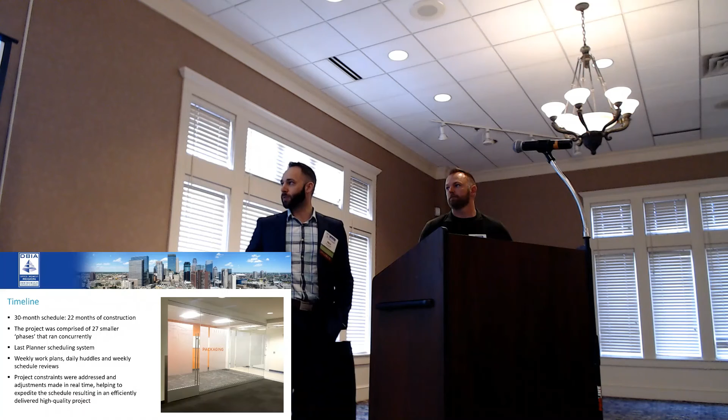As I alluded to, we've got a 30-month schedule up here, but it was probably more like 5 years trying to get to a design that would actually work and move the project forward. There were 6 to 8 months of actual formal design process, and then probably 4 or 5 different areas that were designed over the course of the project, which is one of the reasons I think design build was selected for the delivery method. It allowed design to run in parallel with the beginning of construction.

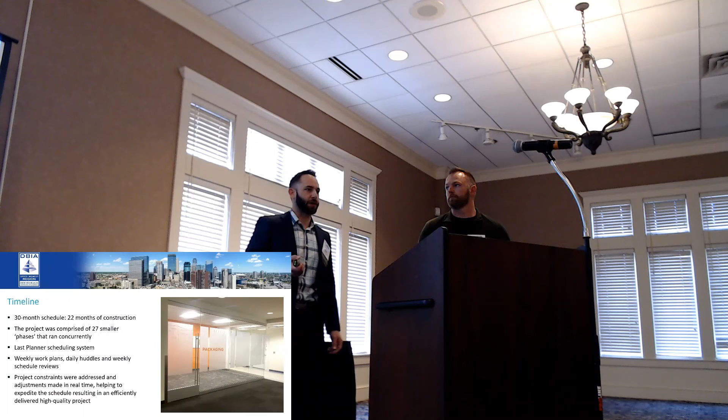Because of the way the project had to be built out, we built it out in 27 smaller phases over those 22 months. So I think we had, what, a dozen phases going at the most? 13 phases going at one time, and one phase was 4 floors of an entire wing.

So you can imagine that's a lot of different areas to be working in, especially in a running, occupied facility that produces food. So the whole time while we were doing this project, General Mills was still in business, making food for sale for the general public.

So they have the capability to do R&D, but if needed, as some of their product lines increase in sales, or marketing does a great job and they're selling more product, the facility is able to ramp up and help supplement production in some of their other manufacturing facilities.

So how did we do it? McGough pretty typically employs what we call the last planner scheduling system. The word collaboration, I suspect, is going to come up a lot in today's presentation. It's a collaborative approach, both between design, contractors and subcontractors, to align on the goals of the schedule, both from a macro level and a micro level—starting with the main project schedule and drilling all the way down to knowing what the work for the next day is going to be.

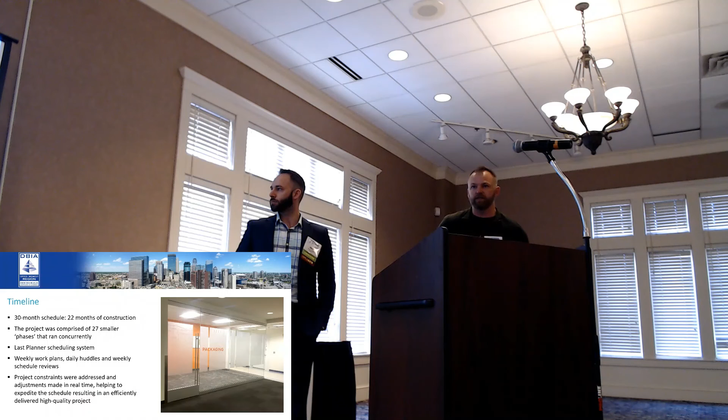I mean, that's where I'm sure most of you use the last planner system, but for us, just having weekly work plans to identify what areas we're working in an occupied facility is pretty standard these days, but it worked great there.

Team structure—we listed out several people here, but kind of the couple of takeaways: General Mills at one point documented, I think, 250 people of management level or above that were involved in the coordination of the project over the course of its duration.

Why design build? I already alluded to it a little bit. It allowed us, from the beginning, to run parallel with construction and design. General Mills is a fairly sophisticated client, and they ended up providing some of the initial groundwork for the design that Alliance then made happen, really, in effect.

The planning process was allowed to move forward on a lot of the more office remodel type stuff. A lot of the beginning of the project from a design perspective was focused on some of the more equipment-intense areas like pilot plants and labs and some of the more mechanical areas.

Mechanical and electrical trade partners were brought in early. We did have a little bit of a budget alignment issue out of the gate. We were able to reel it back in, get back to where we needed to for the client's needs, and move forward—able to complete the project on time and under budget. One of the things that actually helped facilitate the schedule was breaking this project down into so many individual phases. By executing on each of those individual phases, we effectively executed on the main project.

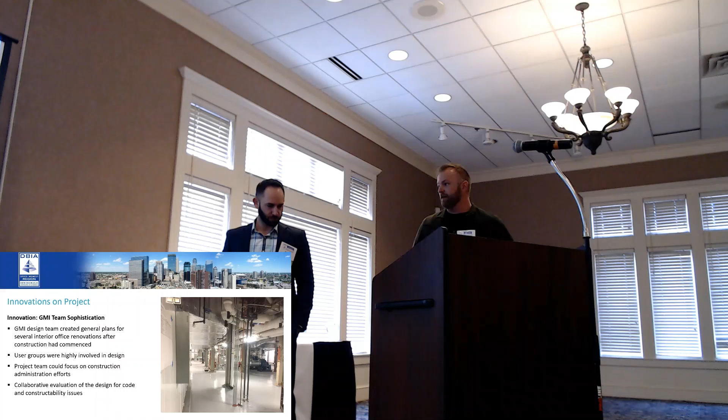I'd like to highlight this picture. At face value it's kind of a boring picture, but for me this is one area where we really excelled. We put in 7 brand new air handlers in the building, an existing building, and expanded a fan loft 16 by 100 feet on both sides to accommodate these new air handlers. If you can imagine flying air handlers over an existing building, the coordination, just moving people from below the flying area, was a nuts and bolts thing, but another difficult area where coordination was key.

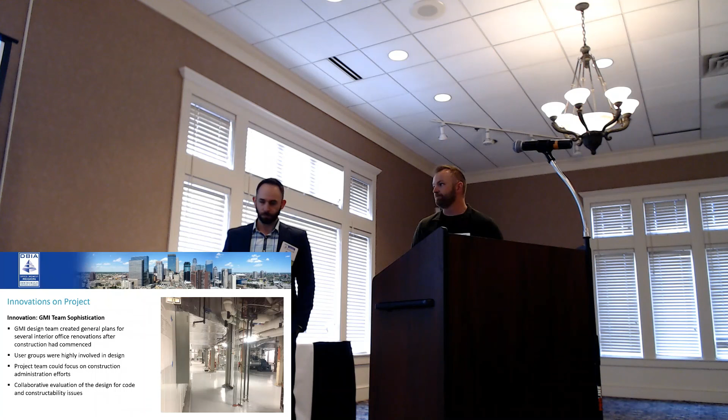The building was fully occupied and operational the entire time, including 16 or 17 product runs over the course of the project that all went off without a hitch. Again, having all those people in the coordination meetings, and the amount of meetings that precipitated from what needed to happen, was key, having the right people in those meetings.

Another challenge we faced was adding a couple of decks to an existing space to give them more floor space. In one of the wings, Wing 7, there were 3 floors in the space, and they wanted to add another floor to support conditioned storage boxes that were being brought in.

The existing footings of the structure would not support this added weight. So we were able to utilize the west side of the building, create an opening, and mind you, I wish we had a plan view just to show how deep into this facility we were, but we essentially cut and removed existing footings 16 feet below grade, excavated and poured new footings - one footing in particular was about 11 feet below grade, underground - and installed new structural steel, all without interrupting operations.

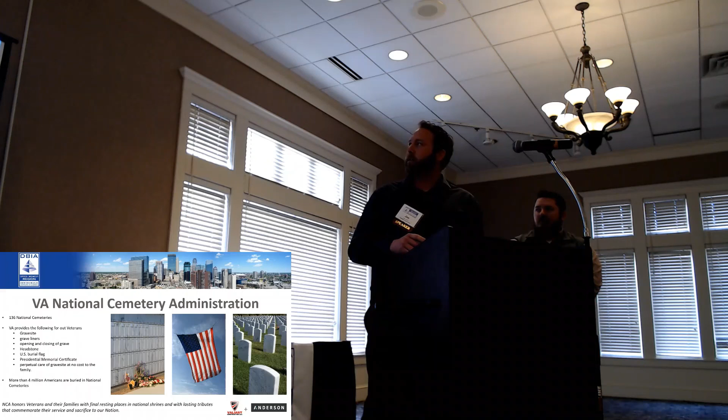So to sum it up, about 10 years ago the National Cemetery Administration faced congressional concerns in Washington: what are you doing for rural communities? You've got beautiful national cemeteries across the country, but they're all in metropolitan areas. Fort Snelling has full staff service, beautiful grounds, but what do you do for areas that don't have access, that are 300 miles away? They found that veterans living remotely weren't using these services or getting buried in a national cemetery.

So the Department of Veterans Affairs did an audit. They looked at all their national cemeteries and decided they needed to pick specific locations to implement a rural national cemetery. Fargo, North Dakota was one choice, and you might think Fargo's pretty big, how do you call that rural? Well, Fort Snelling is about 250 miles away, and the next cemetery in Bismarck is another 250 miles away, so this was a prime location for the rural initiative.

After the audit, they came up with a sketch plan and parameters for what a rural initiative national cemetery is: a condensed version of a national cemetery with all the same elements, except there's no staff working there. Everything is administered remotely—Fort Snelling National Cemetery administers this cemetery, meaning they hire out grave diggers to bury the casket and hire people to provide services like taps and the 21-gun salute.

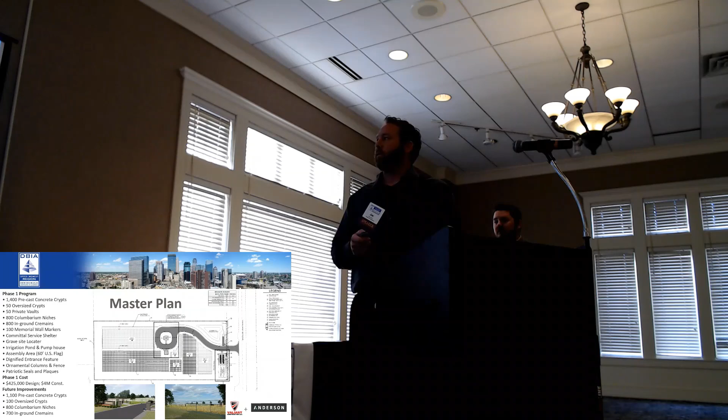I'll walk through some of the program elements and recap with photos later. On the north side, those are called pre-cast crypts—3 by 8 foot concrete boxes that basically fit two caskets. If Grandpa passes away, they drop him in; Grandma comes later and they drop her right on top—that's called a double depth crypt. That's on the north side, shown by the black lines.

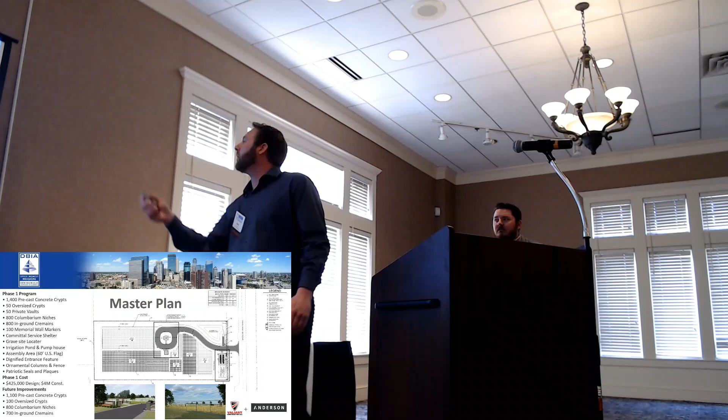The black lines represent phase 1—this is what we built for phase 1. These sections here are columbarium units; I'll show you a picture, but they're basically precast concrete lockers. They set the urns in there, inscribe the marble, and put them in the plaque.

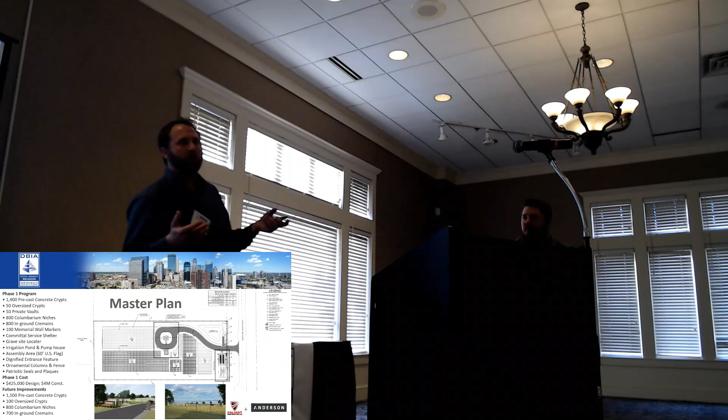Some other cemetery elements include the entrance road. Another rural initiative program element is combining features—we had an entrance feature, and on the back side is a memorial wall. So if Grandpa or Grandma pass and want to be buried in their family's cemetery elsewhere, they still have the option to get a small plaque inscribed here.

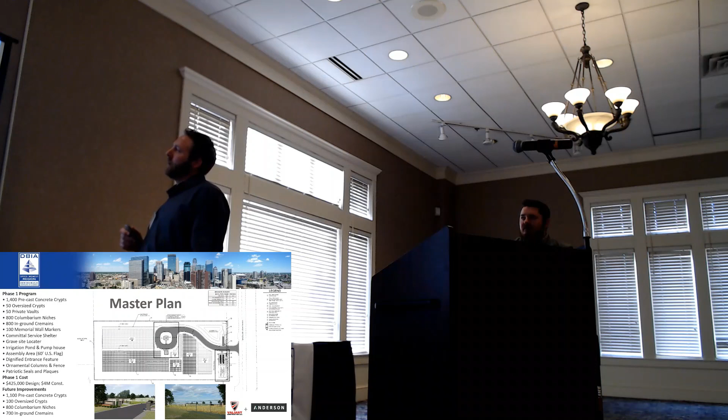Some other elements: the irrigation pond. This is a challenging aspect for this property. Every drop of water from rain goes to that pond, and we use that pond to irrigate this whole cemetery. So if you're driving around Fort Snelling or any other cemetery during the summer and you see those beautiful rows of headstones and green grass, that irrigation pond is more valuable than anything. They take a lot of pride in green grass and those white headstones.

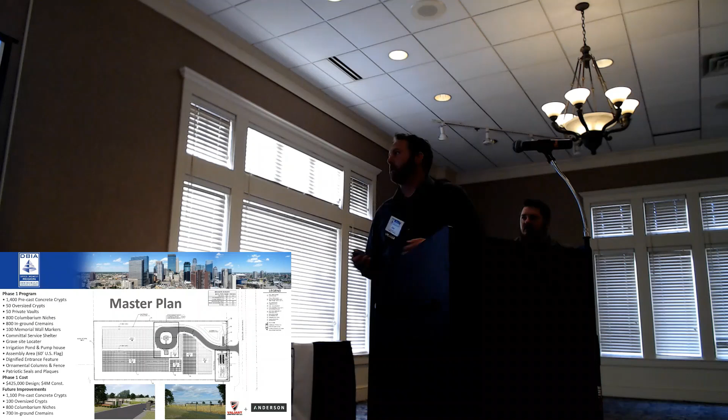Other portions of the project include a committal service shelter and assembly area located here. More or less, that's where they have the services for the veteran, and then assembly areas for Memorial Day weekend services, and so on and so forth.

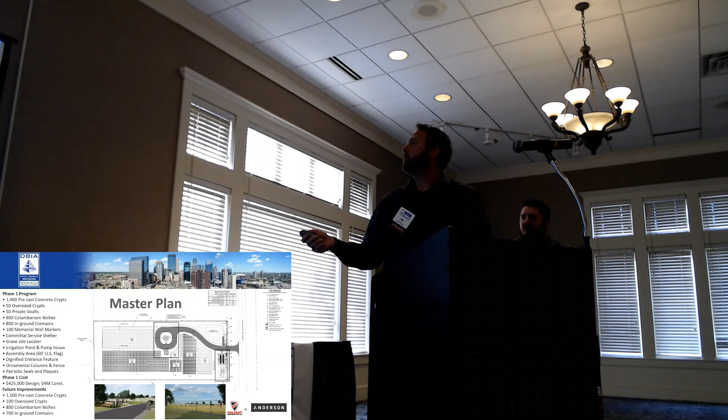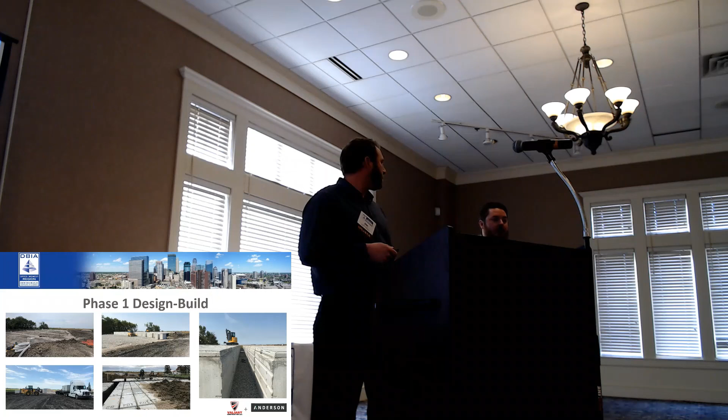The bottom left, you can see semi-loads. What's challenging about these projects is on 3.5 acres we don't have a lot of room for storage, but we've got to keep product coming in the door. That was a major challenge - how, logistically, on a small site we can continue to work. Those trucks hold 8 double-depth crypts per load. We had 1,400 of these crypts and were setting about 50 a day, so you can imagine how often trucks were coming in, unloading, storing what we could, and placing the others on the side of a county road basically. Yeah, a challenge.

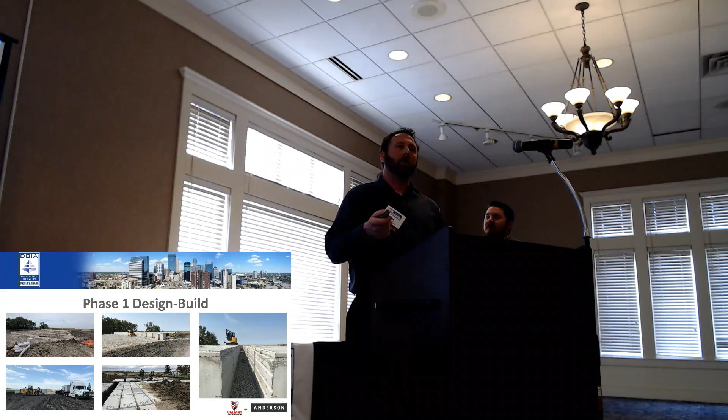I like the photo on the right because it really shows the precision. When they set headstones, it's not only X and Y - if you've been to Fort Snelling you can see those rows, they're just right on. It also accounts for the Z. Headstones sit right on top of that concrete, so that elevation has to be precise to get that perfect row. We all know military, it's all about order - that's where it starts.

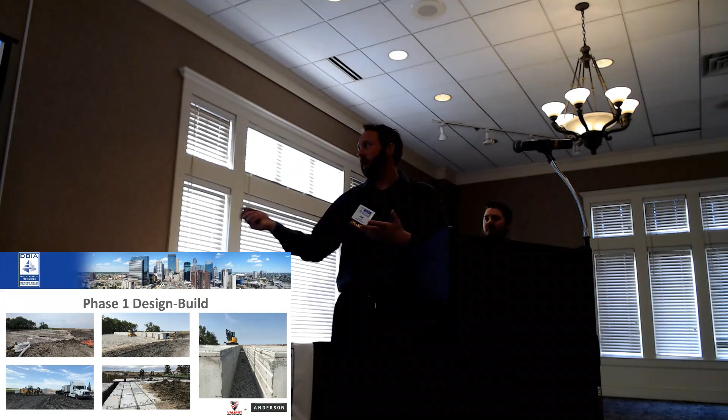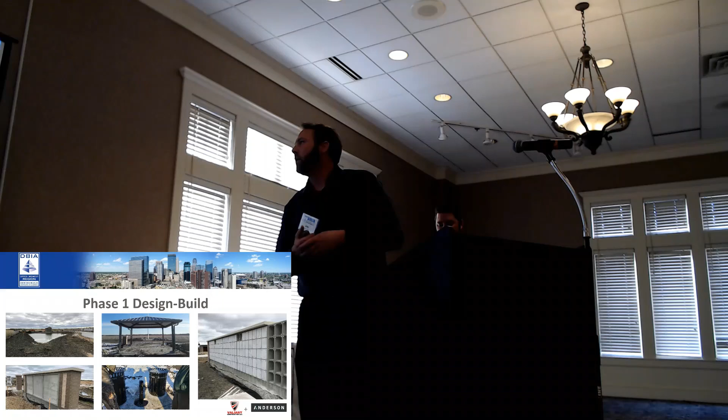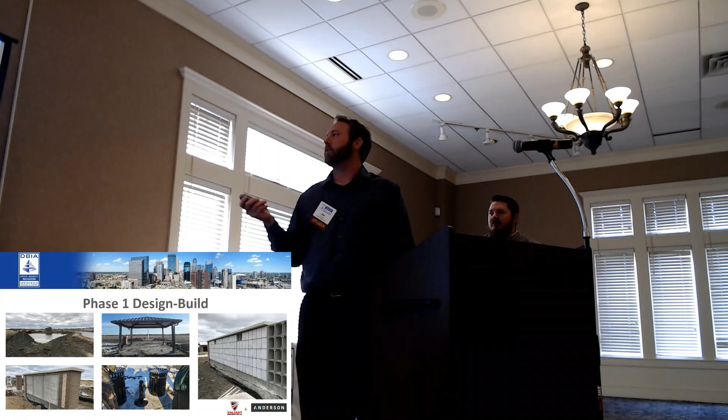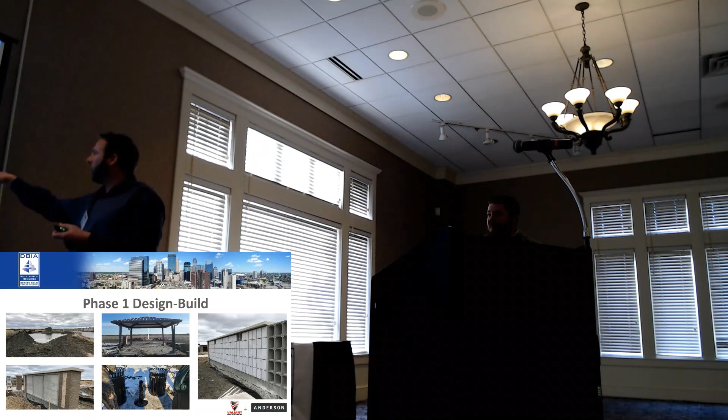A few other cemetery elements I mentioned - the irrigation pond is a very critical point. There's a pump house associated with it, with a wet well. We can probably talk later about some of the challenges with that. Here's a picture of that memorial wall - everything's a row, everything is order. Same with the columbarium units - urns go in, they inscribe the marble face, and place the plaque on that. I showed it mid-construction just to show how the thing gets built.

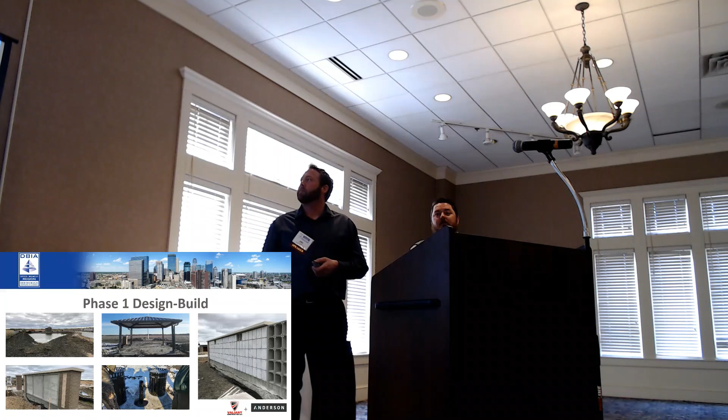And just to add on to that retention pond - this site, being a rural initiative, didn't have adequate access to municipal water like you would think it should. So the entire site drains to that pond, which is used for irrigation. We were able to get a municipal line coming to the site, but it was basically a trickle. In case of a drought or anything, that line will now feed into the pond and replenish it, so we still have green grass during times of drought and whatnot.

Alright, so now we'll talk more about the construction side of things - some of the project milestones. One thing Anderson and Valiant decided to do was, in September of 2017, meet with our proposed subcontractors on site and the COR to talk about some of the hurdles we might run into, some of the design things, some of the soils that - us being from Kentucky - are completely different up here than down there. Then we master planned - Anderson and Valiant worked together with the NCA to master plan the project you now see, and that went all the way up till basically the end of February.

Construction documents came after that. During this process, Valiant and Anderson worked together to buy out the project with our subcontractors before we needed construction, so they could have input into the design and we could get the best quality product.

On February 18th, we had a scheduling meeting in Fargo with our contractors again, getting everyone in the same room. The NCA actually sent a representative from Fort Snelling and the project manager on the project. We sat in that room for 6 hours hashing out the schedule, getting everyone bought into the project, and discussing any questions or RFIs at that time. That's something Valiant has since adopted for every one of our projects, and we love doing it. We started actual work at the end of April, all the way through basically November.

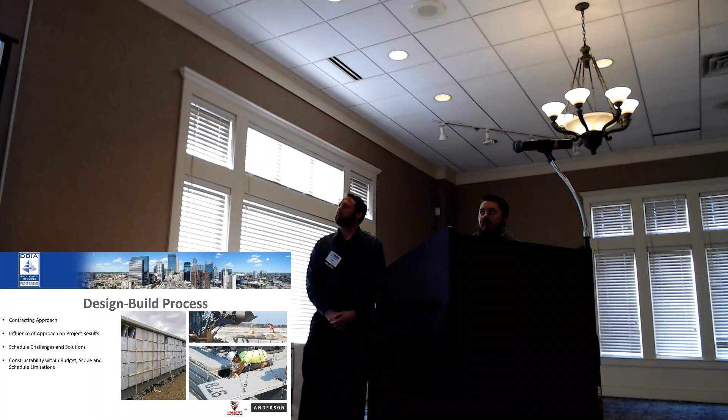As you can see in the top right picture there, the rounded pea rock was spec'd. The closest place to find that rock was actually St. Cloud here in Minnesota. Through the submittal process, we were able to value engineer that rock to a local crushed pea rock, saving dollars and time, and still give the veterans and the NCA the quality of the product that they expect.

Both Valiant and Anderson pride ourselves in our leaders and their leadership. Our leaders believe in the teaming philosophy, which helped us from the beginning to the end of this project. We were all able to collaborate and work together to overcome challenges presented to us.

Technology: Valiant adopted Procore in January of last year and used it throughout this project. That really helped to streamline the submittal process between our subcontractors to Valiant, Valiant to Anderson, Anderson and Valiant to the NCA, and then back and forth. I love it now.